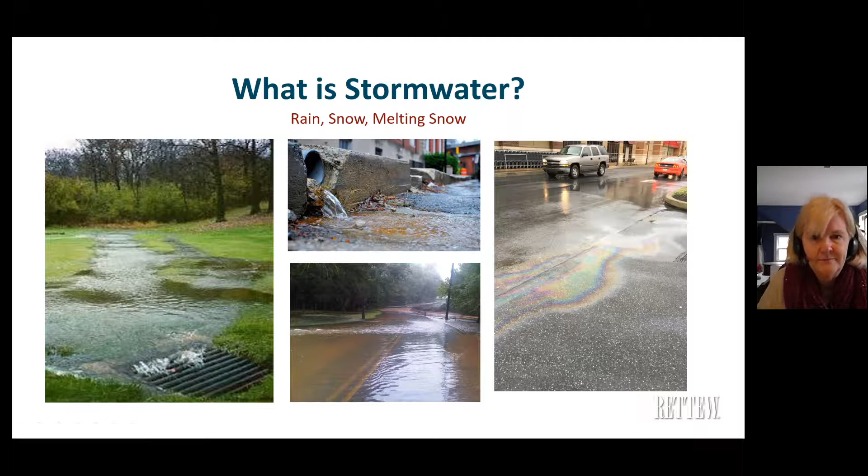And it's managed now by a series of facilities that as a whole are called the Municipal Separate Storm Sewer System. And so we call that the MS4 system. And that's a name that was developed by EPA, the Federal Environmental Protection Agency, and it is referenced in the federal law as the Municipal Separate Storm Sewer System. And so it includes all of the stormwater inlets that you see on roadways and in some yard areas, the pipes that are carrying stormwater, but also the ground features such as grass swales and detention basins. And so anything that is collecting and conveying this stormwater runoff and discharging it into local streams is part of the municipal storm sewer system.

And the designation of it being a separate storm sewer system is really in relation to older systems that were actually combined with the sanitary sewer system. So for instance, Lancaster City, there are significant areas where the stormwater system is actually part of the sanitary sewage system. And the problem with this is that during significant storm events, there's so much stormwater runoff getting to the sewage treatment plant that it reaches the capacity, and a lot of untreated sewage then overflows directly into the Conestoga River. And this is just the way a lot of the systems were constructed in older cities. So, Lancaster, Harrisburg, Philadelphia, a lot of older cities have combined systems.

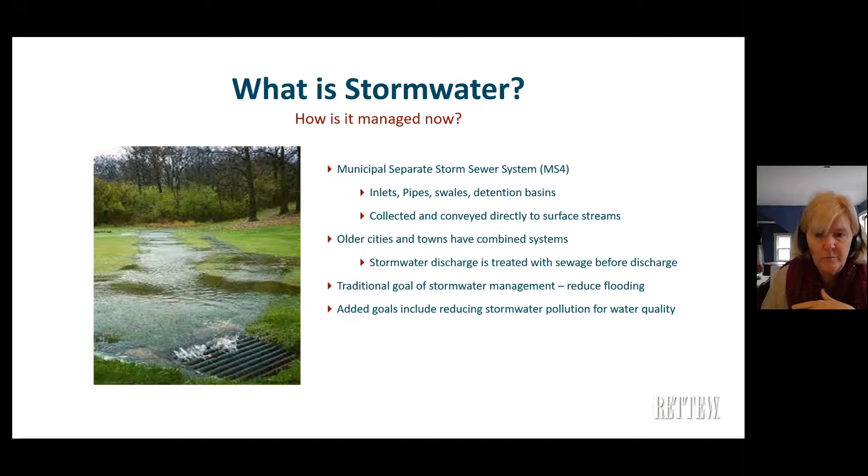And so this is what the concern is now with reducing that type of stormwater pollution, as opposed to the traditional goal of stormwater management, which was really to reduce flooding and protect property. And so when stormwater regulations were developed in the 1980s, it was really about collecting and diverting all of this stormwater runoff to downstream areas as quickly as possible to get it away from the built environment. But now stormwater regulations are really focused on reducing flooding as well as reducing stormwater pollution to protect water quality.

And so why is the township implementing a program? Well, there are federal and state laws that require Upper Leacock Township to reduce stormwater pollution. And Pennsylvania enacted the Clean Streams Law in 1937. And this law prohibits discharge that pollutes streams. So it can be really any type of pollution. And it was primarily enacted to address raw sewage being discharged into local streams, as well as industrial waste.

So the Federal Clean Water Act originally regulated point source discharges from sewage systems and industrial uses. So you had sewage treatment plants that were just discharging raw waste directly into a stream prior to the Clean Water Act, as well as industrial processes discharging a lot of their liquid waste directly into streams. And that was the purpose of the Clean Water Act in 1974.

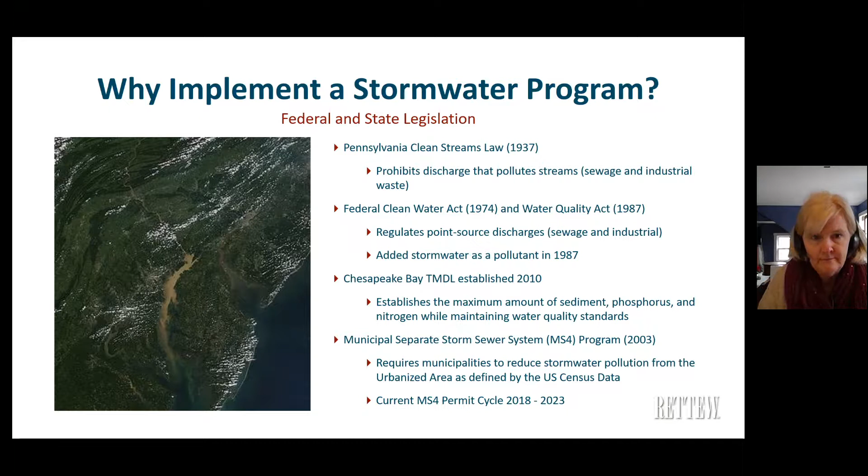And so what are the MS4 program requirements? Beginning in 2003, the township was required to implement minimum control measures in 6 categories. So they have to educate the public on the concerns with stormwater and what activities the community can do to

reduce stormwater pollution. The second requirement is to promote public participation in stormwater and water quality activities, such as coming to public meetings, asking questions about what they can do to reduce stormwater pollution, volunteering with local watershed groups. And this minimum control measure also requires the township to participate in more regional water quality efforts.

So the township does participate at the county level by being part of the Lancaster County Clean Water Consortium, attending training events hosted by other environmental organizations. And in Lancaster County, there are numerous environmental organizations that are focused on water quality. And so the public participation aspect is twofold. The township should promote participation by the residents and business owners in the community, but their staff should also participate

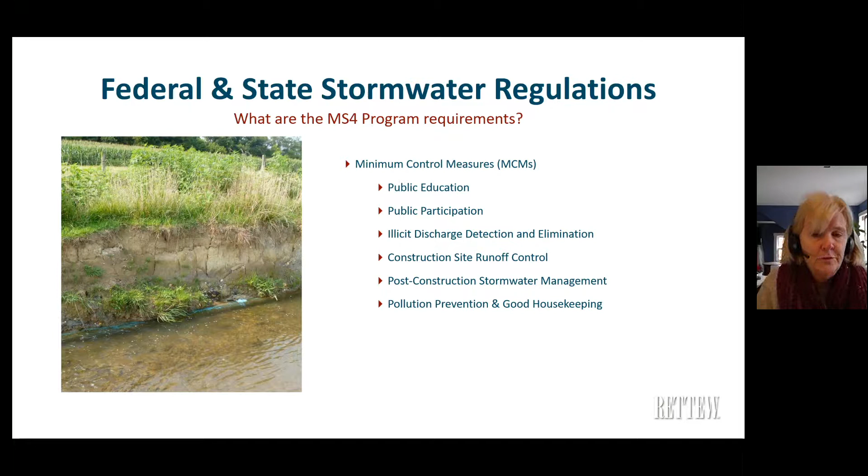stormwater. So that might mean to put up barriers at a stormwater inlet during road paving to make sure that none of that bituminous material gets into the stormwater system. So these 6 minimum control measures were really the primary components of the MS4 permit from 2003 to the current permit that started in 2018. However, in 2018, the requirements really expanded in a way that made it much more costly for the township to pay to comply with the program elements.

So in 2018, to get the current permit, they had to develop a pollutant reduction plan as well as a total maximum daily load plan. The pollutant reduction plan really outlines the existing pollutant load that is occurring in the township and then identifies projects to show that the township is going to reduce sediment by 10% between 2018 and 2023. So it's really a plan that requires the township to implement projects and reduce stormwater pollution. And they have to do this in addition to meeting all of the minimum control measures.

So the DEP regulation requires sediment to be reduced by 10%, but it also required phosphorus to be reduced by 5% and nitrogen to be reduced by 3%. However, the regulation was written that if the township meets the sediment reduction, then they will be assumed to have met the nitrogen and phosphorus. And this plan is really for this 5-year permit term only. And so when the next permit is issued, there will be additional requirements for reducing these pollutants.

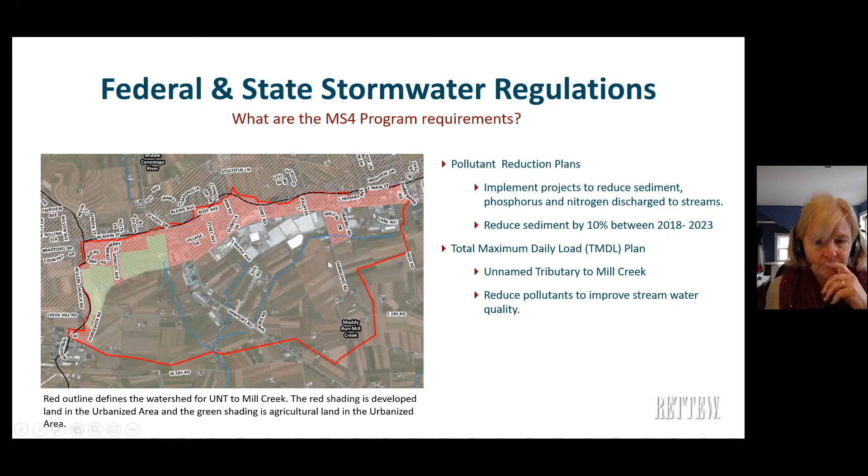So how do all of these impact Upper Leacock Township? Well, it has been a great burden for Upper Leacock Township to meet the requirements of the permit. It's an unfunded mandate, so the township does not get any money to implement a stormwater management program or do stormwater projects. So between 2003 and the present time, Upper Leacock Township just relied on the general fund to pay for stormwater costs, and the general fund is funded by taxpayers. And so all of the minimum control measures and annual reporting that is required by the permit was paid for through the general fund. Also, the development of the pollutant reduction plan and the TMDL plan was paid for through the general fund.

Because the 2018 permit cycle now requires the township to actually implement projects that are very costly to show a 10% sediment reduction, the costs to implement the stormwater program have greatly increased. The overall goal of the program is to improve water quality, and the most cost-effective way for the municipality to reduce sediment pollution is to stabilize stream banks. And so the township is expecting that they will have to do a stream restoration project to meet the requirements of their stormwater program every 5 years.

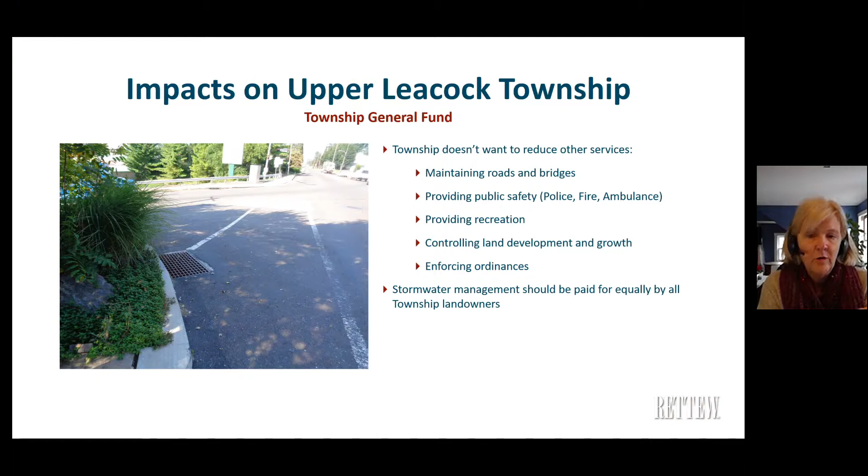And there are a lot of services that the township pays for through the general fund and through taxpayer money. Those services include maintaining all the roads and bridges, providing public safety through the police, fire, and ambulance services, providing recreation opportunities, controlling land development and growth, enforcing their subdivision and land development and zoning ordinances. And so the township understands and believes that stormwater management should be paid for equally by all landowners.

And the township used to have an authority or be involved with an authority that was called the Leola Sewer Authority. That authority owned and operated the sewer and water system since the 1980s. The name was changed to the Upper Leacock Township Municipal Authority in 2020 so that it could take on the role of incorporating stormwater management into their current services of sewer and water systems.

The authority in Upper Leacock Township, as well as authorities in other municipalities, are increasingly taking on stormwater management as another utility to manage. They have experience sending bills out. They have experience operating and maintaining the system, and stormwater management is becoming so regulated that it seems like a logical next step to incorporate the stormwater management system into an authority.

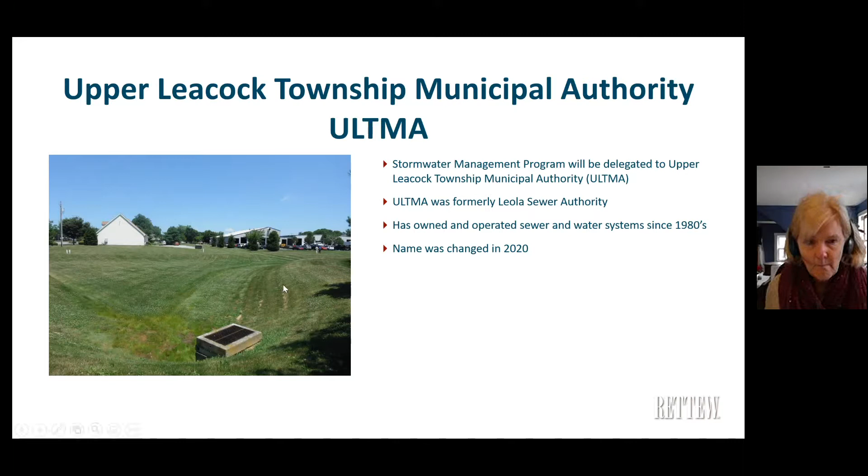And so some of the responsibilities that the authority, also known as ULTMA for Upper Leacock Township Municipal Authority, will take on: they will be responsible to operate and maintain the stormwater structures. That would be the MS4 system, which would be the inlets, pipes, basins, swales, end walls, manholes, anything that is collecting and conveying stormwater runoff.

They will take on ownership of all of the facilities in the township road rights of way, as well as in private easements that are adjacent to the township rights of way, where a failure of a component or structure would cause roadway flooding. So if the township's stormwater system is connected to a private system, there will be no concern with a private system not being maintained and causing flooding. So the township will take over ownership or operation and maintenance of some private facilities close to the public rights of way.

And then all of the stormwater facilities within PennDOT right of way, the state road system, as well as privately owned facilities on private developments, those facilities will remain the responsibility of PennDOT or the private landowner.

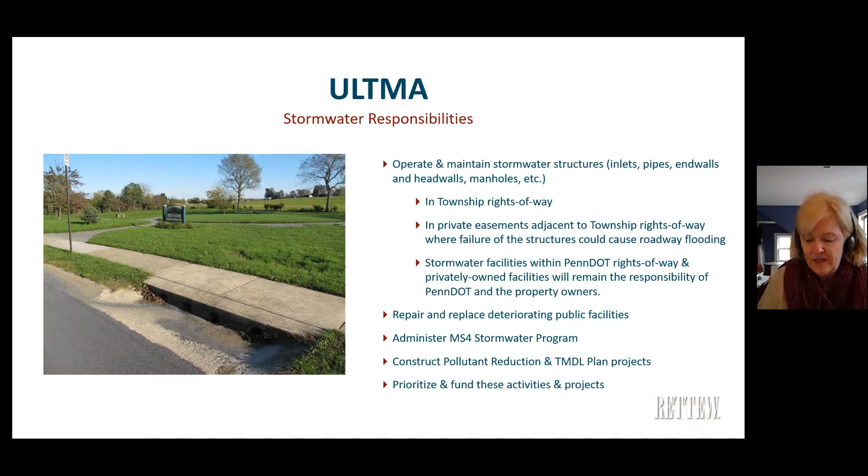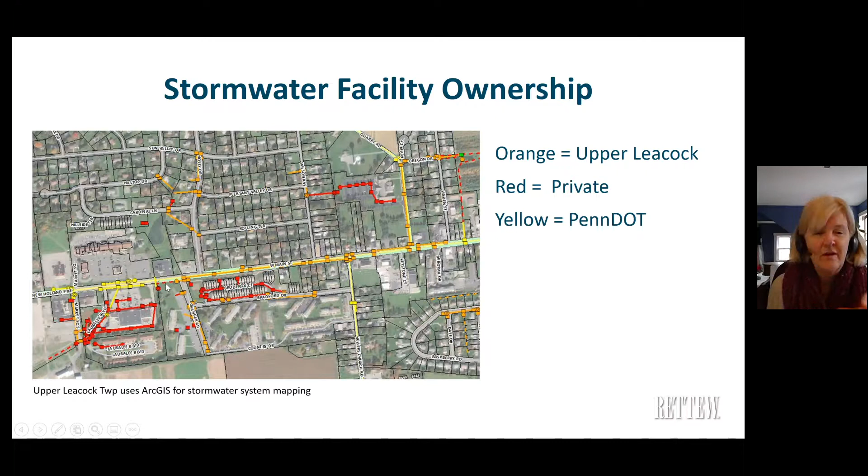This is a map of the township's GIS mapping system that identifies their stormwater system and all of the stormwater systems in the municipality. They do have it color coded by owner. The orange facilities are owned by the municipality. The red facilities are privately owned, and the yellow facilities are owned by PennDOT and the state. And so the township has all of their facilities mapped for the entire township and has a clear understanding of who is responsible for the maintenance of each system.

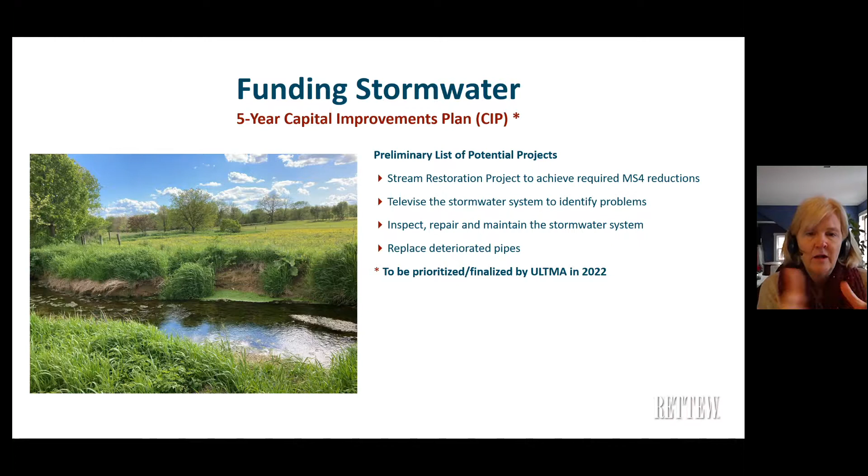So when you look at what it's going to cost to fund a stormwater program, the township is looking at a 5-year capital improvements plan. They're developing a preliminary list of projects that they would like to address over the next 5 years. They're looking at stream restoration projects so that they can comply with the MS4 permit. They would like to take an inventory of the condition of the existing MS4 system by televising the pipes to identify problems and areas where they're going to need to repair or replace deteriorating pipes. And they are going to be working on this plan through 2022.

One of the most important things about a stormwater fee is that it is charged to all landowners in the municipality, including tax-exempt properties. So schools, churches, and hospitals are required to pay stormwater fees. This is not a tax, and so they are not exempt from paying the fee. Just like these tax-exempt properties do have to pay water and sewer bills, stormwater is now going to be added as a utility, and as such, there will be a stormwater fee for that.

So all landowners in the municipality will now be contributing to paying the fee, which will lower the cost for everyone. And stormwater fees typically range from $4 to $10 per ERU per month. Now, an ERU, which I will explain over the course of the next slides, is an equivalent residential unit. So if you're a single family parcel, you're typically considered to have one residential unit. So single family parcels, on average across the country, will pay $4 to $10 per ERU per month. And that's looking at it on a national level.

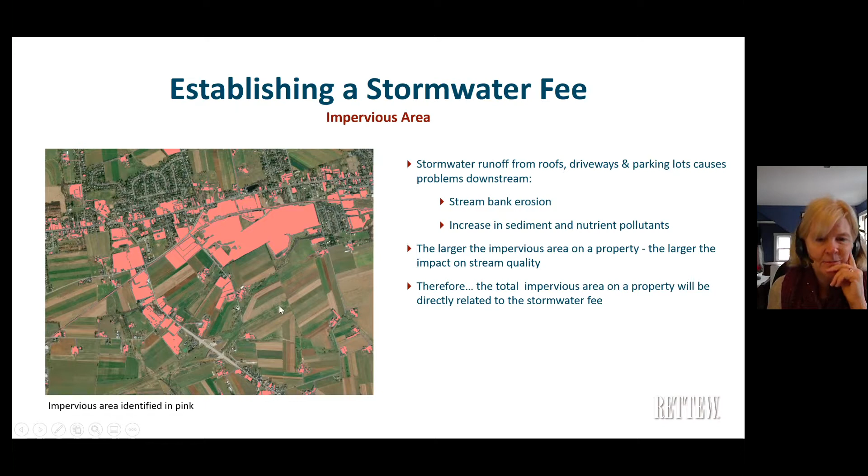And this is a map of an area in Upper Leacock Township where aerial mapping was used to digitize the impervious area, which are identified in pink. So, obviously in the commercial industrial areas, you have large areas of impervious area. And in some of the more rural areas, you can see where the buildings and driveways are. And then the large areas of ag area are not considered impervious, obviously.

So to get into the details of calculating the fee, typically when you're looking at land uses for stormwater fees, you're looking at the single family residential parcels, which typically make up a majority of the land uses in a township. And then you look at the non-single family, which is basically everything that isn't single family. So in Upper Leacock Township, there's 1,960 single family parcels.

So for example, if there's 48,000 square feet of impervious area on a property, you divide that by 4,800, which is one ERU, and you would get 10 ERUs. So based on the calculation of one ERU as 4,800 square feet, the total ERUs in the township is calculated to be 9,288. So we, as the township stormwater committee and ULTMA, have calculated a stormwater fee to be $6 per ERU per month. And this was the number determined that would be able to sufficiently fund the stormwater management program on an annual basis.

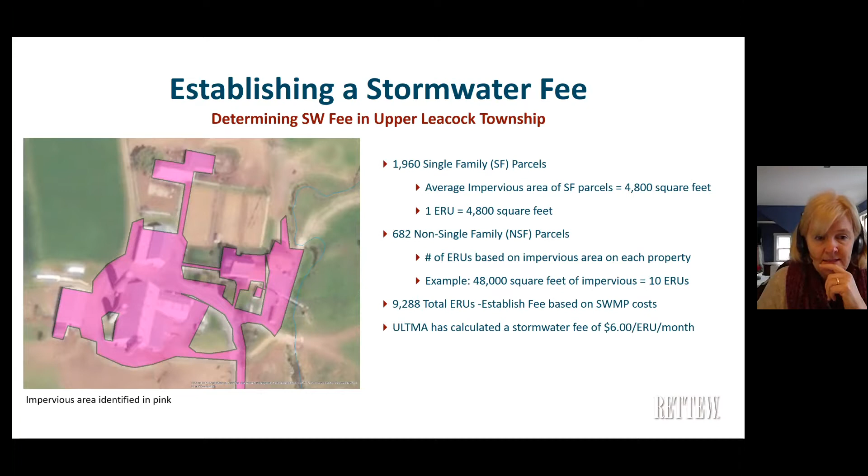And so when you're looking at individual parcels, for all single family residential parcels, one ERU is 4,800 square feet, will be $6 a month, and you'll be billed $72 a year. This is a fixed fee. It's not going to increase if you add impervious area to your property. So if you are expanding your driveway, or if you're putting in a pool, a deck, a patio, any type of impervious surface, a shed, your fee will not go up because you've added impervious area. You're a single family lot, you have a fixed fee.

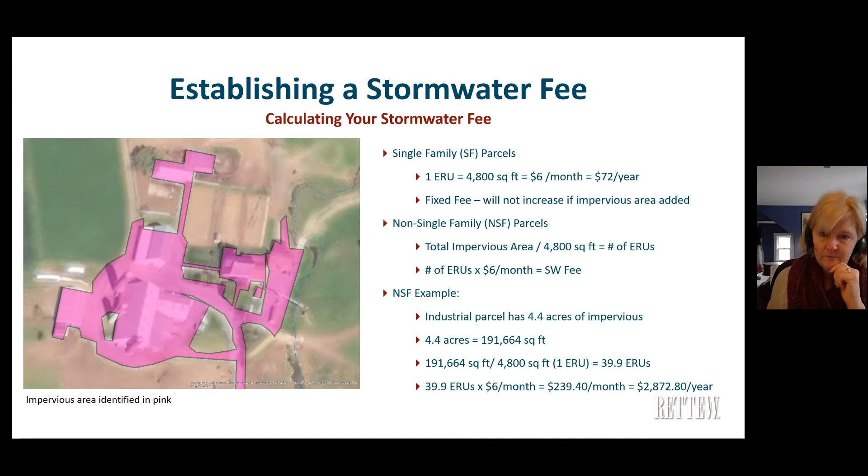For non-single family parcels, your fee will be based on the impervious area. So, for example, if you're an industrial parcel and you have 4.4 acres of impervious area, that 4.4 acres is 191,664 square feet. If you divide that by 4,800 square feet, which is, again, equal to one equivalent residential unit, you end up with 39.9 ERUs. So the fee for that lot would be 39.9 times $6 a month, would be $239 a month, or $2,872 a year. So that is how the stormwater fee is calculated.

All properties with impervious area contribute to stormwater runoff. So all properties should contribute to the management of stormwater. And so we looked at how many tax exempt parcels there are in the township, and there are 65, and the total impervious area for those tax exempt parcels is 55 acres, which would convert to 499 ERUs, and so they will contribute $35,937 a year. So if these tax exempt parcels were not required to pay a stormwater fee, the costs to manage the stormwater runoff from these properties would become a burden to all of the other landowners. And so it's more equitable to include the tax exempt parcels to contribute to a stormwater fee, since the impervious area on these properties does contribute significantly to stormwater runoff.

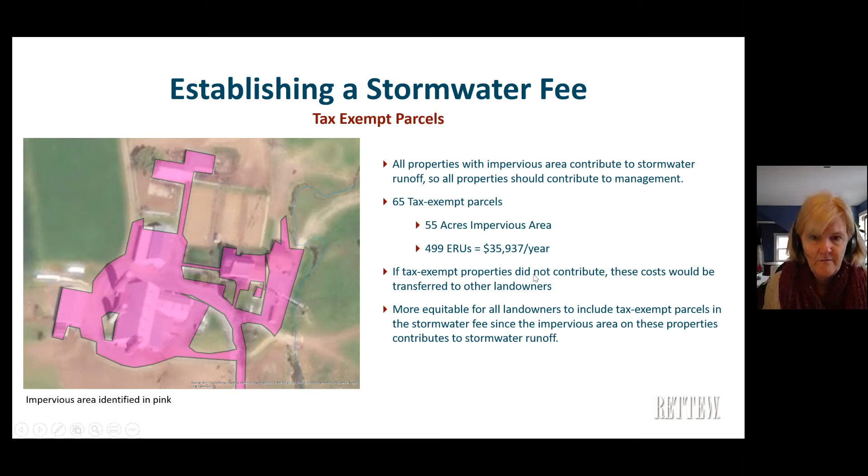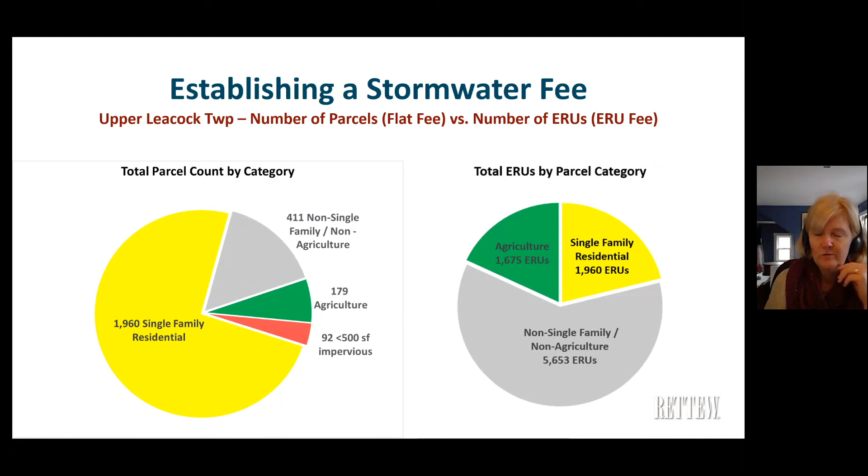So I'm going to talk about stormwater credits for single-family residential properties, and there will be no credits offered for single-family residential parcels. Because you are paying 1 ERU and $6 a month, that is a minimal payment, and you'll have a $72 bill. All single-family property owners will pay 1 ERU, regardless of the actual amount of impervious area on the property. And because it's the minimum amount of payment for the stormwater fee, there will be no credits offered for single-family users. This will streamline the administrative burden for the authority, and reduce overall administrative costs for the authority. Imagine if the township had to offer credits or inspect every time somebody had a rain barrel or installed a rain garden or put in an infiltration trench on their single family property. Administratively, it's too high of a burden.